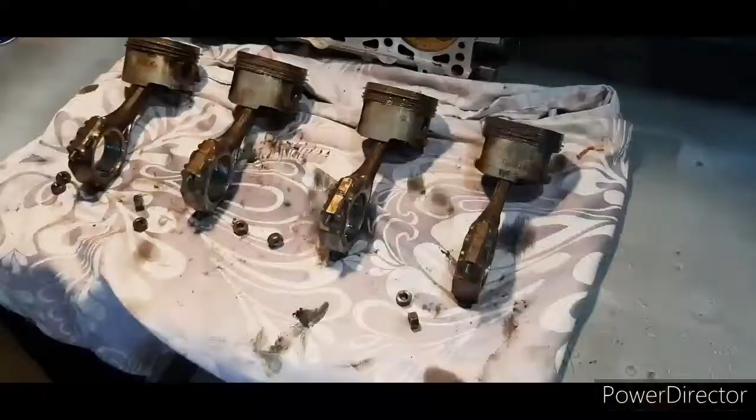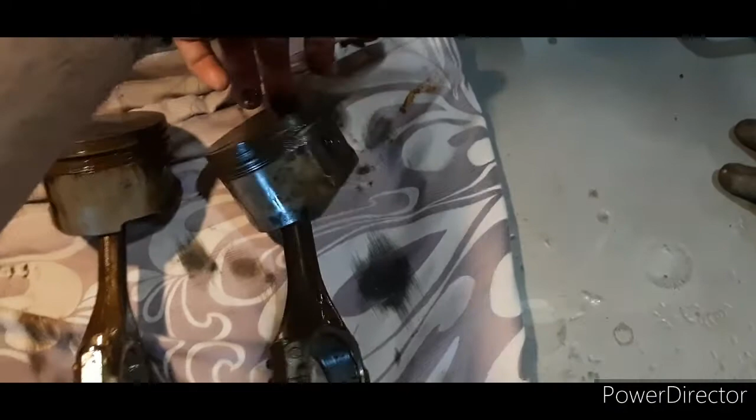So that's all the pistons and rods out. A little bit of wear. Number 1 cylinder piston rings, they're free now, but when I was pulling it out, the top one was seized. It's very tight. 2 and 3 were okay. 4 top sealing ring is completely seized inside the piston. Pistons have got no damage.

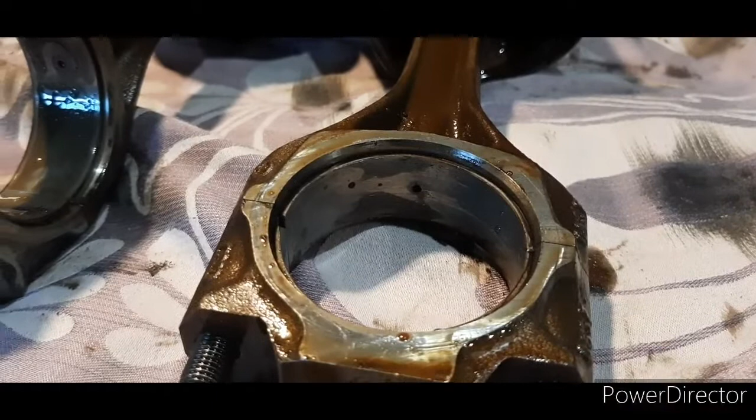We've got a bit of wear on the inside of those. That's about the same on all of them. Only on the top bearing on all of them. Let's roll them over. Can't see that much. That one again, about the same.

So that's nothing really to worry about. They're all even. If you've got one that's doing that and all the rest clean, then you've got to worry, but they're all quite even. I don't know what the mileage is on the engine.

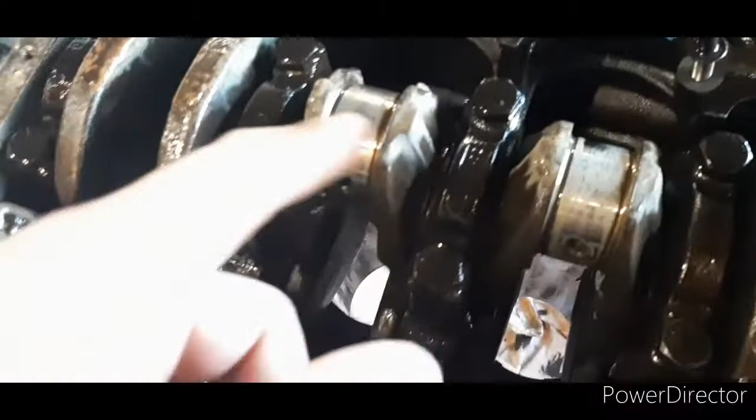Crank wise, this is just water gubbins, but that zooms in the crank. Probably do with a polish up. That's it, but there's no major play in them. No bits of dirt have got through from the oil pump onto the crank to do any bad bits of damage. Again, that's just water marks, oil marks.

So crank wise, we're looking pretty good. Just get away with probably a polish up, clean all the oil ways out. You can see on that oil way there, got a bit of a blockage or a bubble or something in there. So yeah, not too bad on that. Happy with the crank. I'll pull that out next and have a look.

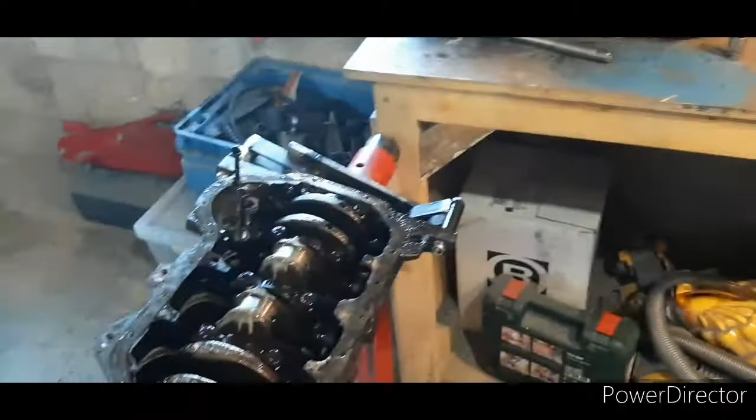But yeah, so the pistons are out now. Not worried about those. I've replaced all the bearings. I've replaced the conrod studs because they're stretch bolts. Don't reuse them. People probably have, but it's not worth it for the sake of, I know, 100 quid for a set of bolts from VW or ARP versus the bolts coming loose and destroying a whole engine. It's just not worth the cost, really. Some things just make sense to pay out for.

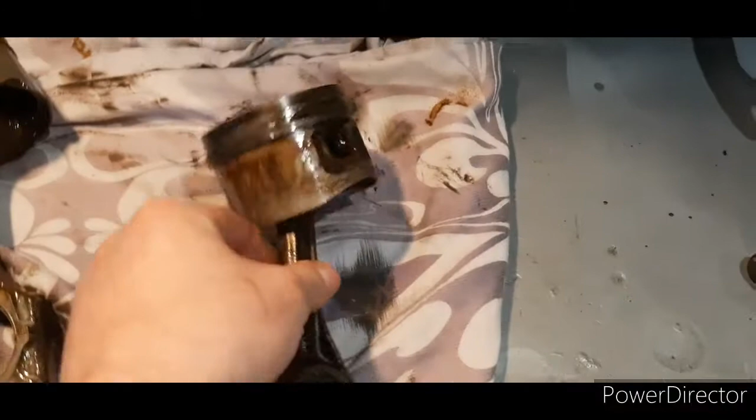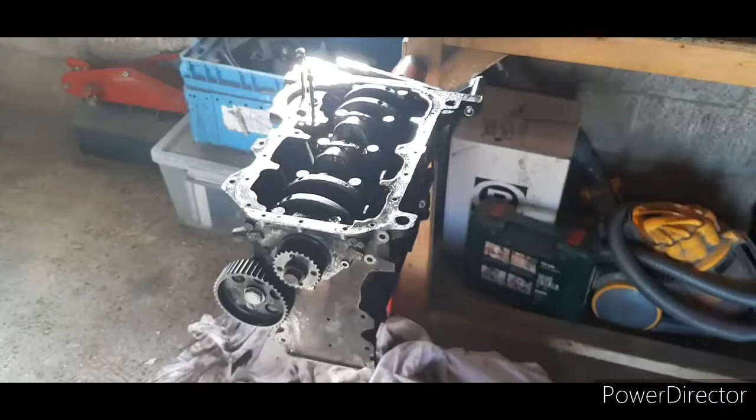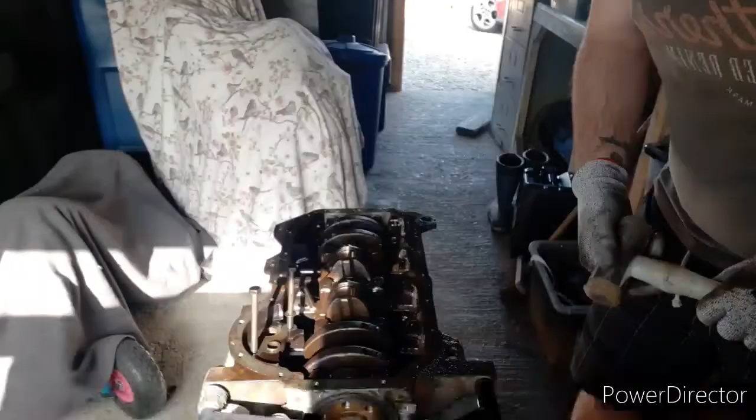Pistons are good nick. Like I say, depending on what can be done with the bore on cylinder 4. Depends on whether these pistons get put back in with a hone or enlarged. Right, so now we need to get the crank out and measure that. But first, I need to get that nut undone, which is tight. So I'll show you a way I do it, which if something slips or goes wrong, it will cause minimum damage. So what you want is a hammer and the socket and a breaker bar.

So slide the hammer in, sits there nice and tight, and that is going to be your lever. So if anything goes wrong, you're only going to break a hammer. There you go. Loose, no damage. Obviously that's just your pulley through and hammer, rubber handle. It's not going to cause any damage to anything. So that's a nice, easy and safe way to undo your crank bolt.

So now that's off, we've just got to get the crank front seal off, a couple of timing bolts, same on the rear, then we can get to all the rest of the bolts, because when the seal's on you can't get a socket around these end nuts, they're too close. So I'll whip those off and get the crank out.

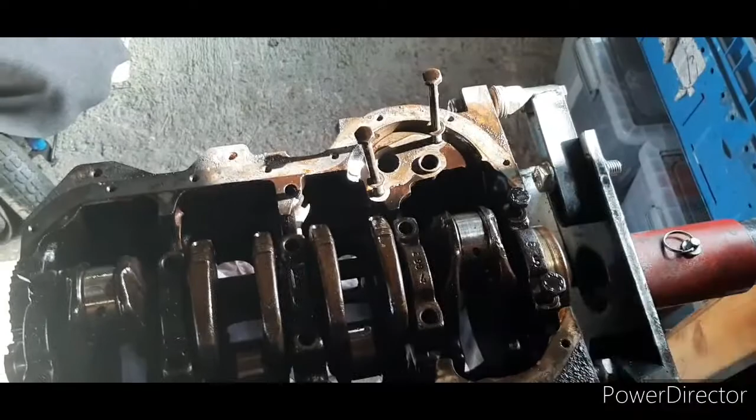Right, so just taking the bolts out. These bolts, they're not stretch bolts, you can reuse them, they're just a 10.9 high tensile bolt. They're only torqued up to 60 or 65 newton meters, so not a lot. And there's no degrees after. If you've got a bolt that's like 65 newton meters and then 90 degrees, that's a stretch bolt. Alright, so these can be reused or just replace them with another 10.9 cap head or something.

And when you take these out, get my hand out of the way first. All the main caps are numbered 1 to 5. Make sure the numbers go relating to the block. So I've got the block upside down now, so the numbers read correctly that way. So make sure the numbers go on this side and not that side, if that makes sense. So make a space on your table, your desk, or wherever you're putting it. Put them out and put them down in a logical order, so you don't forget how to put it back together.

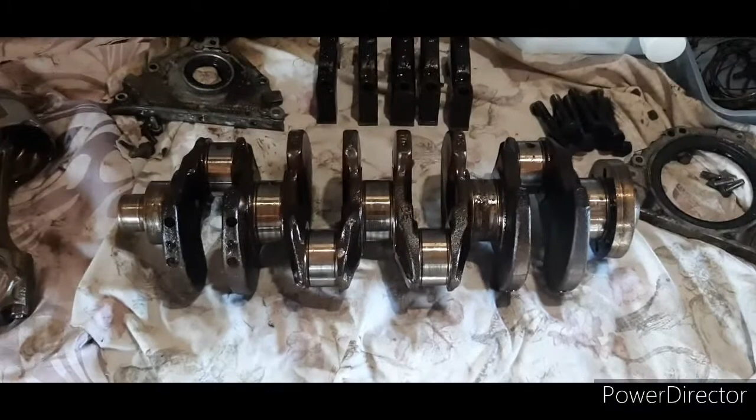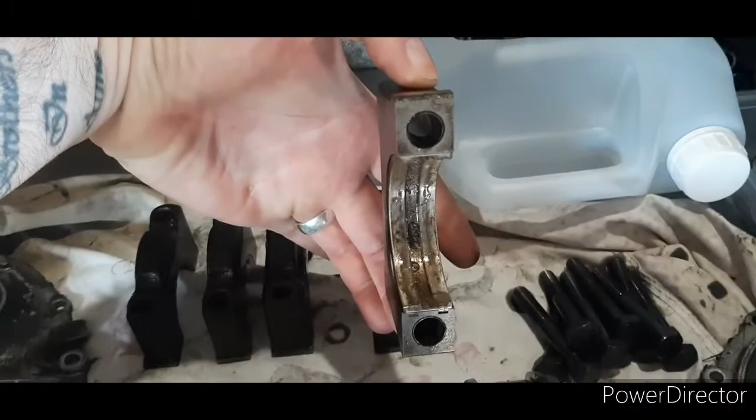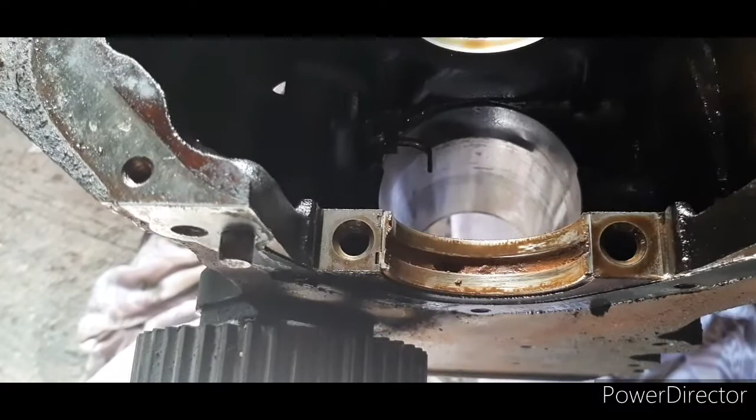So yeah, number 1 looks bone dry inside there. But again, that just wipes off, so there's no problems. And again, there's the other side of that one, just full of grime and rubbish inside there. So hopefully all that will just clean up nicely. So I'll wipe the crank down, and then hopefully that'll be nice and clean.

Alright, there's one way to test your oil ways, make sure they're clean. WD-40 or a can. Stick it in the hole there, the direction it goes. Nice and clean. Into that one. Oh, not good. Again into the other ones. Simple there. So we've got a blockage in number 3, that big end, that one.

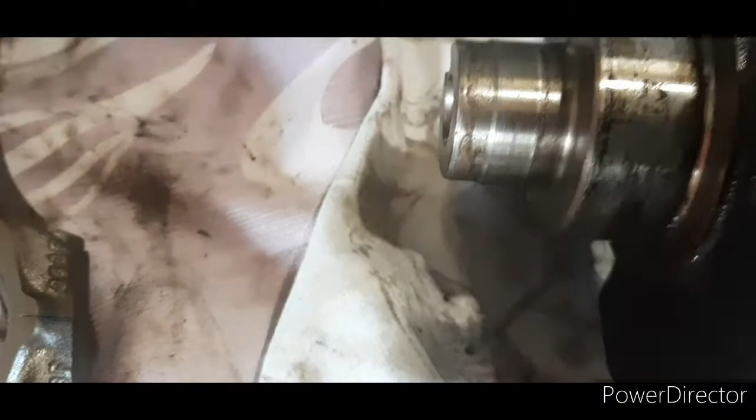The worst is wiped off, but it's going to need a polish. There's nothing marked in it, it's just surface. So again, I've just put some WD-40 on, so I'll let that soak in. It has been sat for a while with rubbish on it, so yeah, that's starting to come off. So I'll just get that measured up.

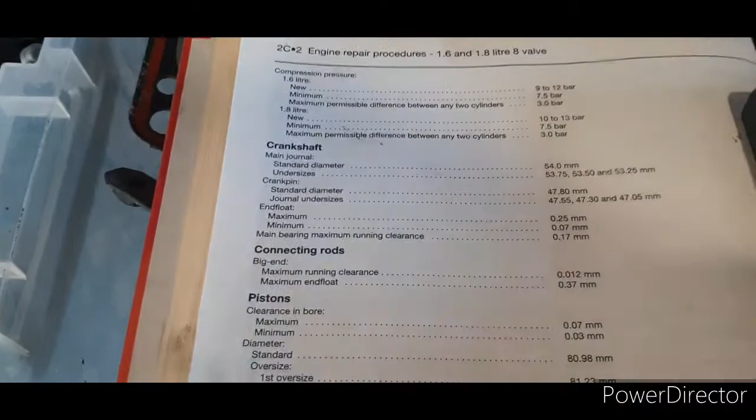Now these measurements are the same between this crank, as in the 9A engine, and the KR engine. Same bearing, same sizes. So if you haven't got the 9A book, just get Haynes Mark II or Google it. But I'll show you here. So you've got crankshaft main journal. That's what you're looking for, 54mm. Now I'm just going to measure these with a vernier.

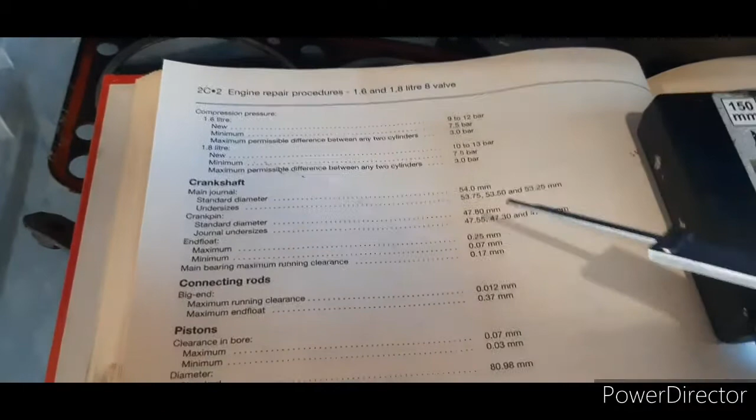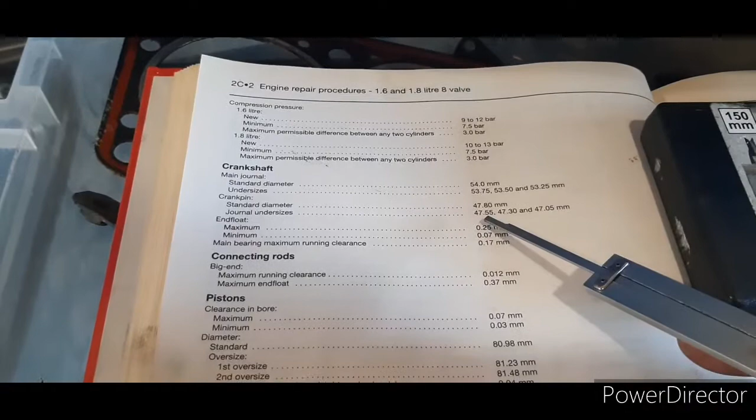Some people call them verniers, but when you're looking at the distances, so you've got 54mm, the next undersize is 0.25, so that's quite a big gap, and even more on the crank pin, which is where the con rod goes. 47.8 is the standard size, and you've got not far off 0.5 mil difference for the next drop down, so you've got large drop downs for the wear. The crank in the 1.9 I took out, bang on those figures.

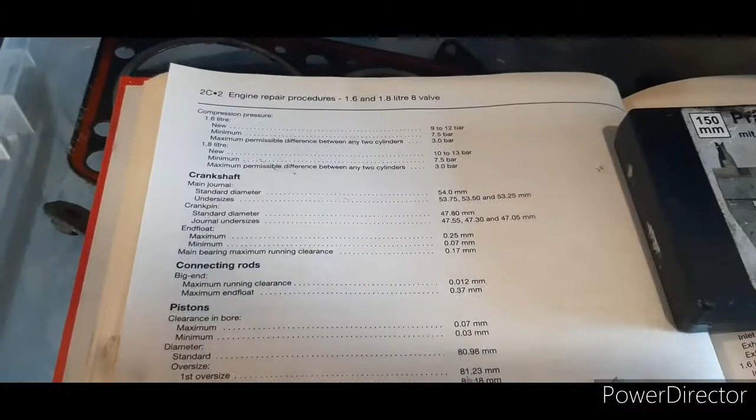So I'll just use the vernier, make sure they're on 54 and 47.8, as long as they're there, I'll be happy with that. So I just finished measuring this. So we've got 54mm and all the mains, perfectly fits on there, even that one, no worries with it. And all the crank conrod journals are all 47.8 bang on, so no worries with this whatsoever. Those will just get a polish up.

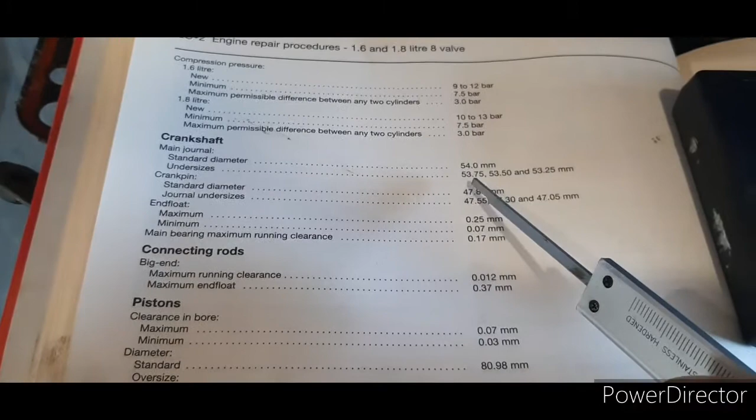And if you're worried about, like I showed you in the manual, you've got your differences there. So I've got 54, I'm happy with that. I've dropped this vernier down to 53.75, or as close to as I can by eye. And just to confirm, that won't fit over there. And so you've only got the option of a standard sizing. So they're all within tolerance. So much happy with that.

You can go to the effort of using the Plastigauge, all that sort of stuff, but VW cranks are very good. Nothing to worry about really, so just needs polish. I'll get some wet and dry and just rub those two down just to double check I'm happy with them. But again, that'll just get a polish up, clean the oil ways out, and that can go back in when it gets built up finally anyway. So that is the crank, happy with.

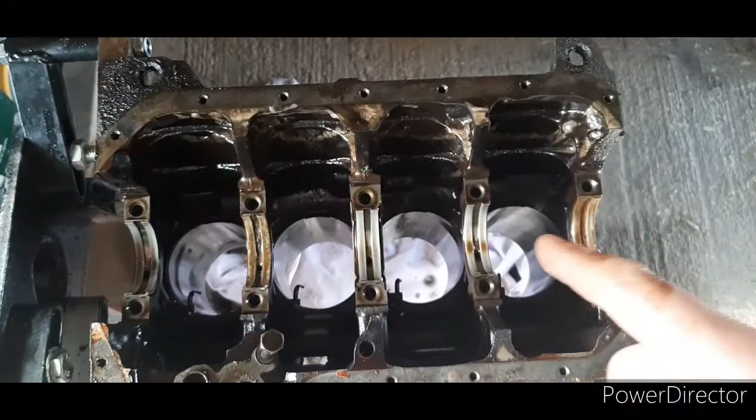Again, block wise. Now, all the upper bearings have the recesses in them. It's only that one that has a 360 recess. Can't remember why, they just do. So, no worries with those. Again, I'll just clean the oil ways out, clean all the gunk out, and then that can be ready. Yeah, so don't look too bad in there, apart from the old number 4, which needs reboring.

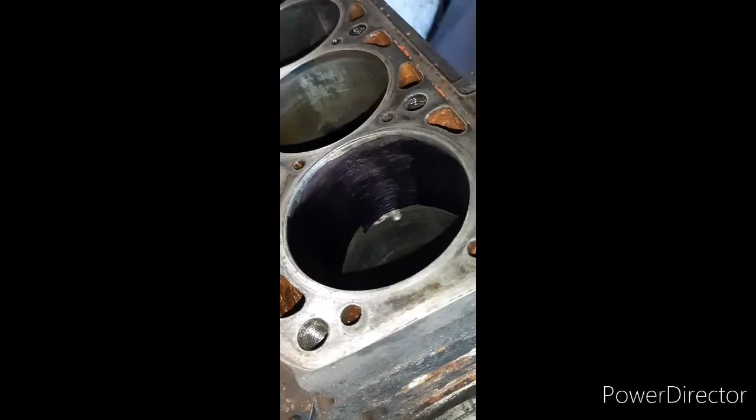Right, so what I've done there, this is a little sort of tip to work out what sort of damage you've got depth-wise. So I've just coloured in, this is the problem area, that line there, and a little bit on the other side.

So I just coloured all the top of the bore, permanent marker, all the way around to see what we've got. And what we'll do then, get a bit of 320 grit sandpaper on a thin cylinder, a bit of wood, just rub it around gently. And then once all that permanent marker's gone, what you should be left with: ideally nothing, but you'll see your lowest points. So I'll get that done now and you'll see.

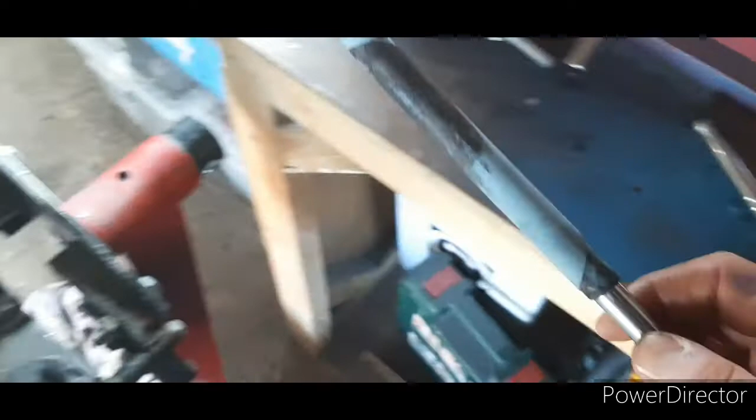So this is my makeshift tool I was using for the bore. Just a bit of sandpaper. I didn't have a wooden dowel, so extension bar. Just rub it around the inside like that. Nice bit of pressure on there. And all that's doing is taking the permanent marker off and leaving the indents in there. So you see all those darker points. That's the permanent marker still on there because it hasn't gone over. So that just confirms 100% it's going to need a bore out.

How much? I've only got the option of really half a mil ideally. If not, it'll go to a mil. Ideally not a millimetre because then you're limited on the head gaskets with the thickness of the firing ring gap in there. But when it comes to the point, I'll get that bored out and then they'll do a half a mil. If it goes clear, then it's fine. If not, then they'll do a mil. So that's not a worry.

So next job will be getting the auxiliary shaft out. I'll do that another day. Measure it while it's in the best I can, get it out, and I'll do a talk on the bearings because you can get wear on the bearings and there's quite a simple reason why they do. So that all comes apart quite easily. Not hard engines to take apart. Again, put things down in a logical place.

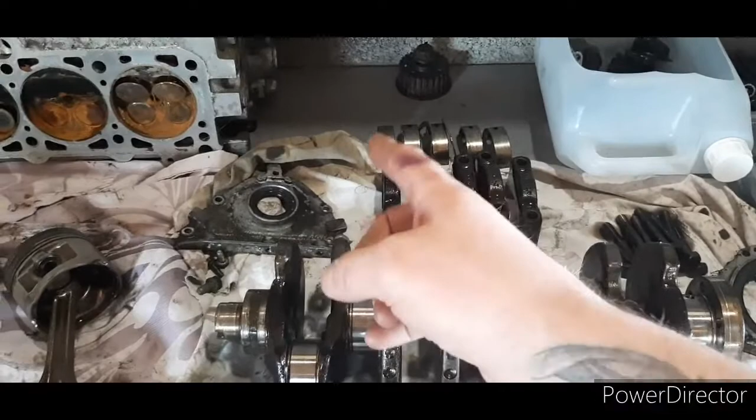I've taken the crank out. I've got 1 to 5. Got the upper bearings 1 to 5. Front, rear crank seals. Simple things like that. Pistons don't matter too much unless you're going to put them back in, but those rods will be balanced anyway. So it doesn't matter which way they go at the moment. Once I finish them, they'll be plus or minus a couple of grams, ready to go back in with some bigger pistons. And then looking forward to getting onto that head.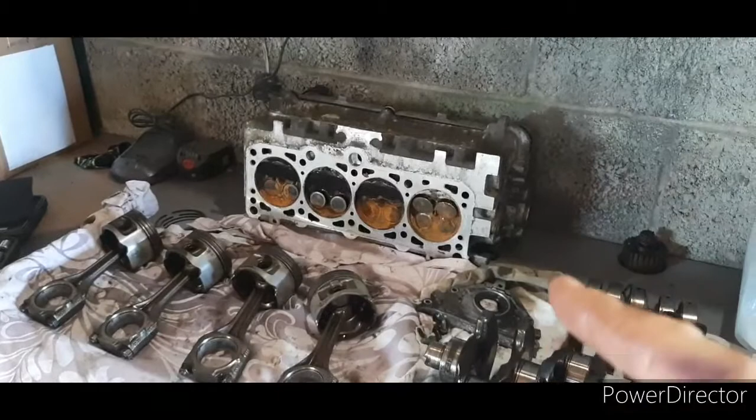That looks disgusting at the moment, but just some rusty stuff. And again, if you're going to leave a crank out, get anything on it, some kind of oil, just to cover the surfaces, just to protect it so it doesn't get any pitting on there from the rust. So as you can see, those two are cleaned up quite well. There are still little marks on there, nothing major, you can just feel it with your fingernail. That's just where it's been sat. It's the worst on the bottom part, where obviously the engine's been sat.

So when they go to the machine shop, they'll get polished up first. Obviously they all measure up now within tolerance, but once they're polished they'll drop down. So the machine shop will have the information of what bearings are available for this, or I can give them the copy out of the book. So once they've polished them down, they'll measure them all up and make sure all of the bearings for the mains are the same size. So we could end up going one size under just because those two need polishing, but we'll come to that when we come to it. But nothing catastrophic. So that's all those cleaned up, so that's good.

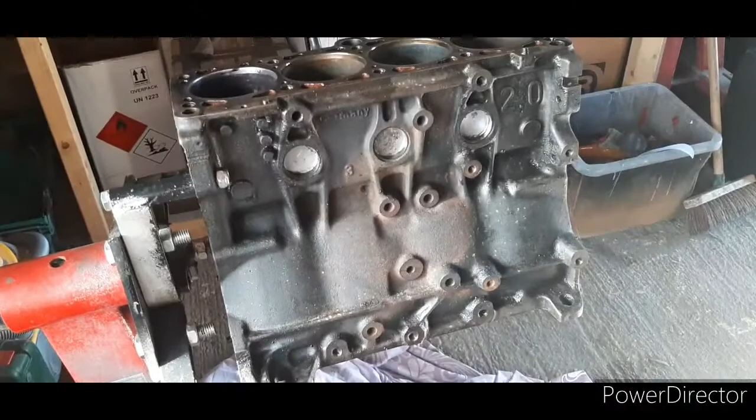I did give the block a bit of a degrease as well, just the worst of it. All the mess down there, a couple of toothbrushes and some oven cleaner. Clean that all off. It'll need another going over, but just enough to start taking things apart. I'll give it another good degreasing once the auxiliary shaft's out, and I'm ready to put everything back in as a sort of transport mode until I'm ready to get things built up properly.